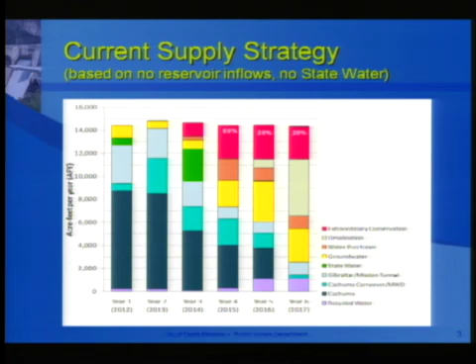This is a chart of our monthly demands. We've been watching these every month. The green dashed line is what we would plan based on the average seasonality of demands. And the blue dashed line is our target for the 20% demand reduction. So you can see in the months of June and July, we've really seen a great response from our community in meeting the targets for the 20% savings.

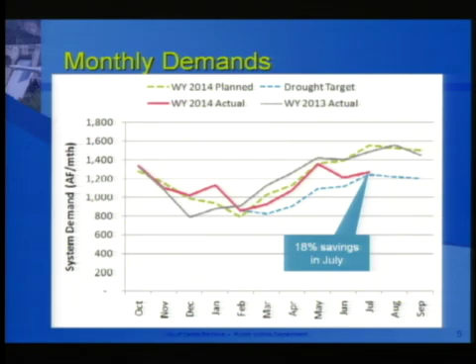This looks at it in a different way. I'm sorry, one moment. Mr. Russell? Or Mr. Ruiz?

Yeah, could you go back? Sure. I just want to make sure that I understand this presentation because I've watched it a couple of times now. And I guess I'll start by saying, why is water year 2014 planned and water year 2013 different?

Water year 2014 planned is based on an average of the last 5 years, while water year 2013 shows slight variations from month to month due to weather and rainfall. So every year there are always fluctuations from month to month. At the end of the year, for water year 13, we ended about 3% higher overall than what we would normally have planned.

Okay, so we have a common understanding, it's my understanding that 2014 actual is total potable metered water sales, including the 3 irrigation classes. Is that correct? It's actually total production overall system-wide, so it's not based on metered sales, but rather the amount of supply produced. This is looking at a combination, total demands for our potable and recycled water system.

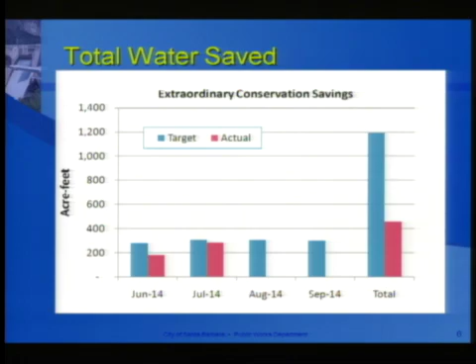This chart is a breakdown of each of our customer classes and the different tiers of water use, just to explain where the water is typically being used. We have single-family residential on the far left, by far our largest demand compared with the other customers, primarily because we have the most accounts—about 19,000 accounts for single-family residential. About half of our water is in tier 2 and tier 3, which are the green and red bars. So we're really targeting the water usage in tier 2 and tier 3, which is considered more discretionary use in our messaging.

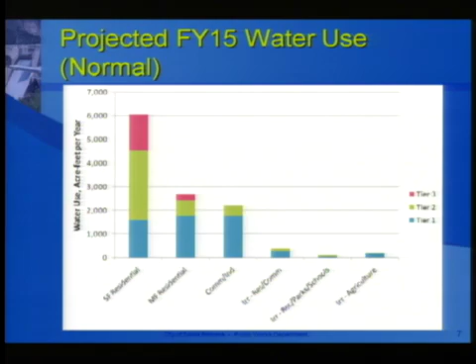Supplemental water, our goal was to get about 4,500 acre feet of supplemental water purchases, and we've been working with CCWA for several months and have secured water from Vandenberg Air Force Base, about 1,150 acre feet. That is water stored in San Luis Reservoir. We also have contracts with Biggs West Gridley, and Mohave Water Agency for another 1,800 acre feet.

And in addition, we have banked water at Dudley Ridge. That's water that the city's state water that was put into storage in the groundwater basin. And we would look to try and get that water back next year if needed.

And right now, the state water pipeline is running at full capacity to deliver all this water. It's the pipeline going from San Luis Reservoir into Cachuma Reservoir, and it will be flowing at full capacity all the way to January to deliver this water.

And so we're holding off on additional purchases at this time and going to see what next winter looks like before purchasing additional water. But there is room in the pipeline next year if we have another year with 5% state water allocation and need to fill the gap.

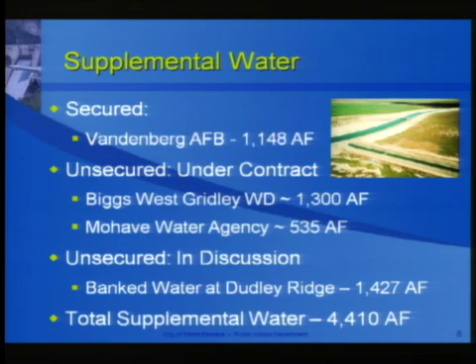So our infrastructure. One moment, Ms. Dyer. I just wanted to ask, the fish release issues and the downstream releases, they don't interfere with our ability to take state water right now?

Not right now, because CCWA has implemented a temporary fix. There was an issue a few months back, if you recall. The Hilton Creek watering system failed, and the Bureau had to use the outlet works to do fish releases, which did limit our ability to deliver state water into Cachuma.

CCWA installed a temporary pipeline. It's an above-ground pipeline that bypasses the outlet works and brings the water into a different location in the lake, which resolves the issue of imprinting, which is a concern per the biological opinion. So for right now, it's a temporary fix, but we should not have any limitations due to the biological opinion.

To receive the water, is that something they're thinking about leaving there? Because that seems like a good idea. I think we'll have to look at a long-term fix and see how much that costs. Thank you.

So the city's capacity in the pipeline from San Luis to Cachuma is about 3,000 acre feet. This is about 20% of our total annual demand. So it's not enough to meet all of our demands. It's just a portion. And without the state water system to convey the supplemental water, which we purchased this year, we would be looking at a 40% shortfall next year.

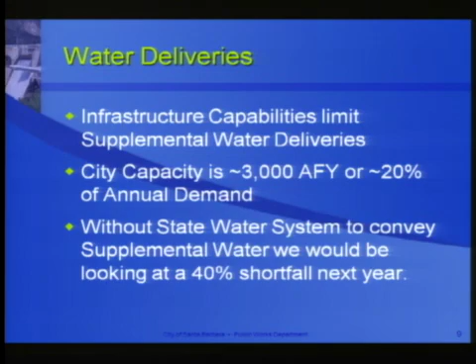Lake Cachuma is about 33% of capacity. It's important to note that not all of that is water for the Cachuma member units. Some of it is downstream water rights. And so the remaining deliverable project water, which is for the South Coast member units, as well as Santa Ynez River Water Conservation District ID1, the remaining deliverable water is expected to be 21,500 by October.

All of the member units have agreed to take a 50% or 55% reduction in our entitlement for next water year, which begins October. And the hope is to have some supply remaining into 2016.

And we've been in discussions with the Bureau of Reclamation regarding fish release requirements. Our biological opinion states that once project water reaches 30,000 acre feet, fish releases can be reduced. It doesn't go into specifics on how exactly that would happen. The Bureau will have to consult with National Marine Fisheries Service, and I'm sure there are going to be concerns with the timing and the months, and there may be some seasonality that they want to factor in. So they are currently in discussions on how that might look.

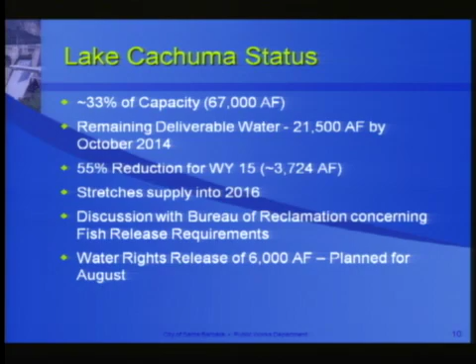Okay, thank you. Madam Chair and Chairman, the drought response capital projects, we have the recycled water system projects. I'll be telling you about our update for our groundwater projects, our desalination plant, and the COMB pumping project.

So first, the recycled water system projects. As you know, we have the tertiary treatment plant, and currently it is in construction, and it's anticipated to be online by summer of 2015 with a capacity of 1,400 acre-feet per year.

We also have a Valle Verde well project. We anticipate that we will be getting 300 acre-feet per year from this, and it's anticipated to be online at the end of this October. And this is going to be a non-potable groundwater source that we will be pumping into our recycled water system.

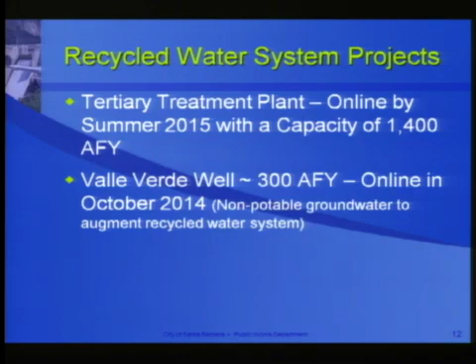Last month, I mentioned... Ms. Taylor? Yes. Excuse me, I know that we have a performance term in the recycled project construction contract. Do you happen to know what that date is? Actually, there's a presentation later on about the recycled... No, there is not, I'm sorry. I do not know that date, but the engineer, Lisa?

Yes. That's fine. Okay. Thank you. Okay.

Hopefully next month we will see us coming up out of the ground. Then our groundwater projects—our highlight is the Alameda well replacement. If we recall, the Alameda well in Alameda Park has failed, and we're trying to drill a new well. We do have a site that we've located, and we've all decided that will work for everyone. We will be going to the Parks and Rec Commission on August 27th of this year to present the project to that commission.

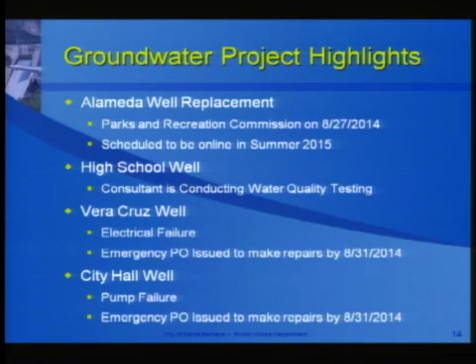Our upcoming desal project milestones—we plan to have a desalinization project update to council on September 23rd. We'll have a lot of information on that date, but I just wanted to mention what our upcoming milestones are.

The first is September 23rd, where we'll present a summary of all the preliminary design findings with recommendations and project estimates. In November 2014, we'll release it.

Actually, it'll be an RFP for design, build, operate services. In February 2015, we hope to receive proposals for these services. And in April of next year, we'll be back to council to consider an award, depending on the water supply status. By then, we will pretty well know where we stand after the winter rains, whether we need desal or not. In summer of 2016, we're projected to start the desalinization operations.

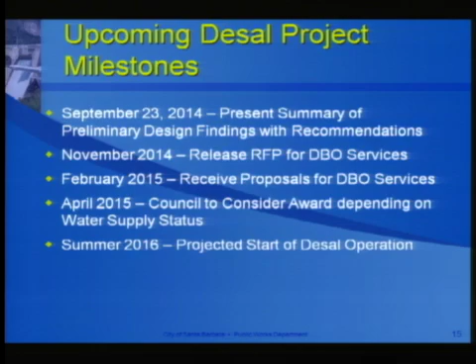The supply strategy for the desal timeline—this is a similar chart to what Ms. Dyer showed, with each year and the different water supplies from our water portfolio. In year 3, which is 2014, we've begun the pre-design. In year 4, 2015, consider award of the design-build-operate contract.

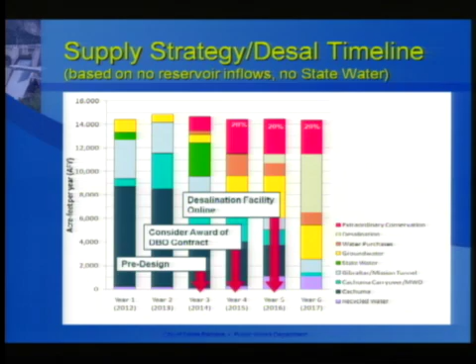Within year 5, 2016, the desalinization facility would be online. And it would be online in time for year 6, 2017, which, if we do not have inflows into our reservoirs and no state water, will be a critical need for water.

Is this contingent on some sort of permitting that we don't have in hand? This is, of course, contingent on permitting at this point. I'm not sure the status of that right now. We'll know more at the meeting on September 23rd, where we stand with that. But of course, we'd have to have permitting in hand, yes.

At the city council meeting, you mean? Yes. So would you be getting information from the Coastal Commission or the state board or something? That's anticipated—there's a lot of activity going on right now, between now and then, yes. Thanks.

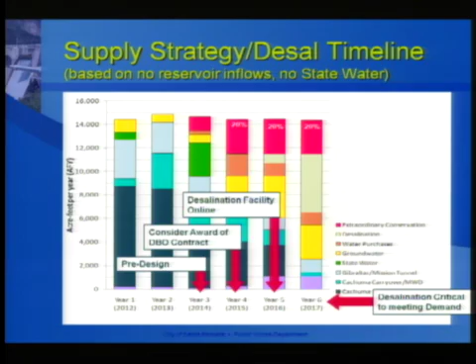September 23rd, so you've scheduled that as your city council report. Yes. Are you going to be able to give us a September update? I'm not sure. I don't want to promise that because there's a lot of things happening very quickly, and I would imagine there'll be an update. I doubt it'll be exactly the same update that will be given to council, because again a lot of information is coming in, and the consultants and staff are working really hard on this—it's a very quick timeline. Thank you.

The COMB Pumping Project is still scheduled to be online by the end of September this year. The total cost for capital and operation through March 2015 is about $6.1 million, and the city's shared cost is $2.2 million.

As for grant funding, the city received preliminary approval for a $500,000 California Department of Public Health grant, and we have to follow up with City Council with a forthcoming resolution. The IRWM grant, a regional grant application, has been submitted for approximately $2 million for this project.

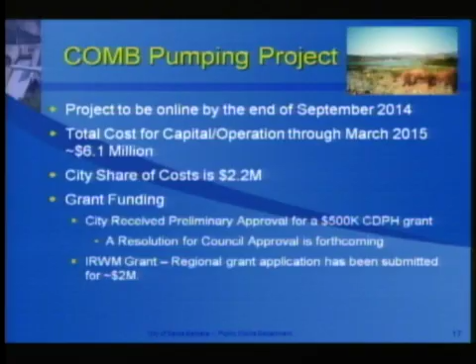Ms. Taylor asked whether that IRWM grant would go to the project overall, not specifically to the city's portion. The response was that it would be understood as going toward the city's portion of that project. We're hoping to see this resolved soon.

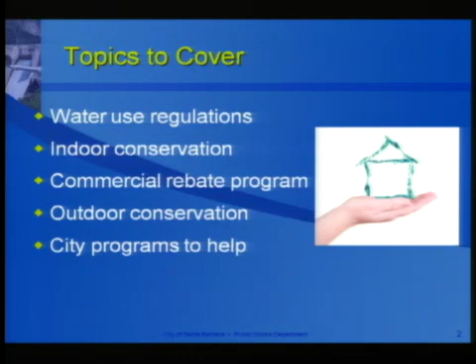The Stage 2 regulations went into effect starting May 20th of this year, and we've tried to do as much education as we can, though much of it is handled on a case-by-case basis as we see issues occur. Washing of pavement and other hard surfaces is generally prohibited. For irrigation, we're trying to limit water lost to evaporation, so for automatic sprinklers and manual watering we encourage that it take place in the evening and early morning hours when evaporation is lower. Pools must be equipped with a cover to reduce evaporation. Large commercial fountains are prohibited. Water can only be served on request in restaurants, and drought notices must be placed in restaurants, hotels, and gyms.

We have a handout on the table in the hallway, with all kinds of information and handouts that I'll be referring to, including one available in English and Spanish about these regulations.

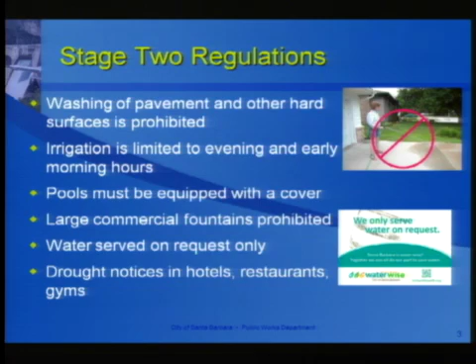This is a picture of the water use in the average home. The salmon colored section is landscaping, exterior water use, and that's a pretty large majority of the water we use—this is pretty typical for all of California. Inside, there's definitely a mixture, but we do see that light purple leaks in there.

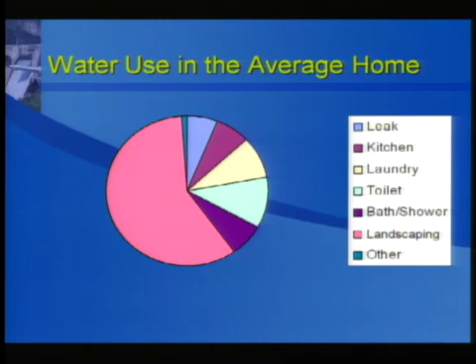Let's talk about some indoor conservation opportunities. A lot of this is behavior, because the plumbing code is much more stringent, especially starting this year in 2014. It's pretty impossible to go out and buy a toilet or a shower head that wastes water—they're very efficient, and that's all you can find in the stores.

So it's really behavior, such as when you're hand washing, instead of letting the water run, use a basin or tub. Soak pots and pans, or if you have a dishwasher, make sure you scrape the food off instead of using water to do that, as well as no running water for defrosting food.

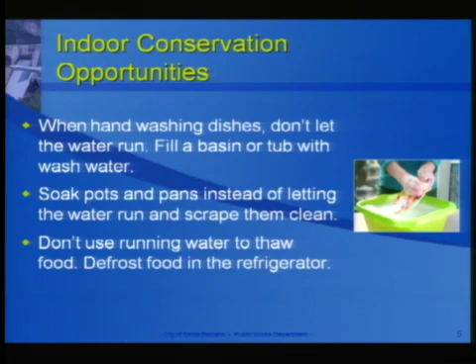Run full loads in dishwashers and washing machines—they've come a long way as well, these appliances, but as long as you're using one of the older versions, just try to wash the largest load possible. And of course, turn off the water when you brush your teeth, shave, wash your hair, etc.

This is something we tell the kids to do in class, and they generally tell us that they do it, but their parents don't. So we always try to encourage that everyone turns off the water when they do these activities.

Showering, keep them to about 5 minutes or less—try to shave off time as you can. We also ask you to join the bucket brigade and fill your bucket with cold shower water as you're waiting for it to heat up. We do have some buckets out in the hallway. Or you can also, if you have a large enough bin, stand in a bin and collect all that water. There's many ways I've heard of people taking on this challenge and collecting that water and using it for their plants.

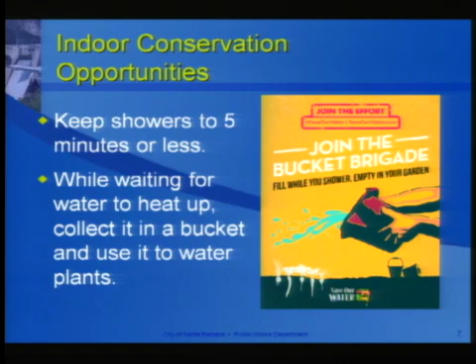Checking for leaks is always a really important one—I talk about that throughout this whole presentation. Also, we do have a rebate for high-efficiency washing machines, because it is possible to still go out and buy one that's not too efficient. So we still have a rebate on that.

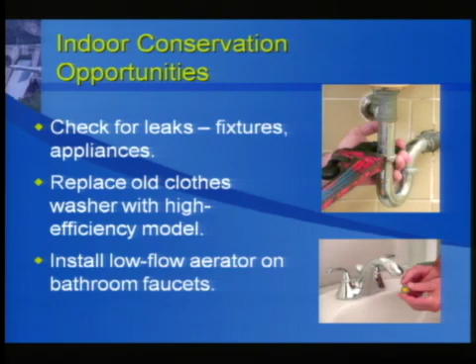And then also this really simple aerator on bathroom faucets, which you can see right here. Most of us have them on our faucets, but they have really efficient ones, and we also have those out in the hallway. They're best for bathroom faucets because you aren't filling large tubs or pots with water, so you really need it for minimal amounts of water and not really high volume. So we have 1 gallon per minute aerators out there in the hallway.

The biggest problem inside is actually the toilet. Toilets are very sneaky—they leak and they run when we aren't paying attention. So I encourage everyone to look for 3 things in their toilet.

We have dye tablets out there in the hallway, and all you do is place it in the tank, wait about 10 minutes, and then check the bowl to see if it's blue—it's just a little food coloring tablet. If it's blue, that means this flapper, which is the rubber red piece right here, is leaking. So the water's going from the tank into the bowl and then down into the sewer.

So you never hear it and you never see it, because it's not pooling up on the floor—obviously, it's going down to the sewer. That's about 200 gallons per day when that leaks. So sometimes when people call us because their water bill doubled, it's pretty regularly the toilet. And you never know when these flappers are going to start failing.

Also, when you're in the back of the tank dropping the tab in, take a look at this overflow tube and make sure the water level in the tank is about 1 inch below the top of that tube. Because here in Santa Barbara, when we're all sleeping, the water pressure rises and it'll rise in the back of the tank and start pouring over the overflow tube, and you're asleep so you can't hear it, you can't see it—and that's again about 200 gallons per day for that overflow tube.

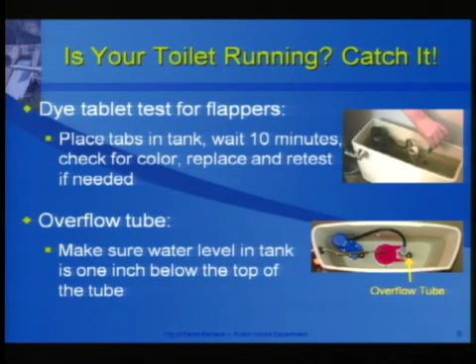The last thing, and this is another flapper issue - this is the flapper right here - if you have the wrong flapper, it could be leaking constantly with the dye tablet, or it could also be flushing at a much higher volume than the toilet's designed for. Most of our toilets are about 1.6 gallons, but as we've been going around testing some of them, they're flushing at 3 gallons or even more just because it's the wrong flapper.

So take a look at your toilet, watch the tank when you flush, and when the water goes down it really shouldn't empty the entire tank. It should leave a couple inches in the bottom, and the flapper should close pretty quickly, after about 4 seconds. If it stays up and it's running, that's how you know it's flushing at a much higher volume. So again, you just need to buy the exact flapper for your toilet. These aren't very expensive - they're tiny pieces of rubber, but they can really cost you a lot on your water bill if it's not flushing correctly.

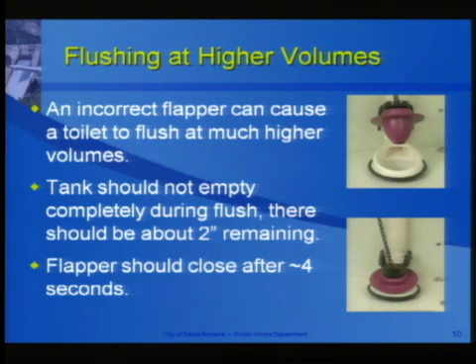Does the city provide inspection of this type of thing? Yes, we do. For our water checkups, which is an indoor and outdoor visit to your site from a specialist, we do the dye tablet test. We take a look at the level in the back of the tank, and we usually tell them to check for this, because if you flush the toilet right away with the dye tablet, the test won't work. So we educate them about the flapper issue. This one's less common - it's more common for the overflow or the dye tablet - but it's just something to, every once in a while, watch your toilet as it actually flushes to make sure it's not draining the whole tank.

And is this service provided only if someone notices their water usage seems higher than makes sense and requests it? You have to request the water checkup, but we don't have an eligibility requirement for it. So if you just wanted a water checkup, you could get one. If you think your toilet might be having issues, you can. We have this information on our website too. If people feel like they have a leak, these are the really common things we tell them to look for.

Water softeners can also be a hidden waste of water, especially some of the older kinds that backwash on a schedule. What we recommend is our hardness setting in the city is about 20 to 25 grains per gallon. You can try setting it at 20 and see how it goes. Sometimes it takes about 2 weeks for these softeners to change over and backwash. If you think it's not soft enough, you can try setting it higher and higher. But we've had a lot of people simply set their water softener lower.

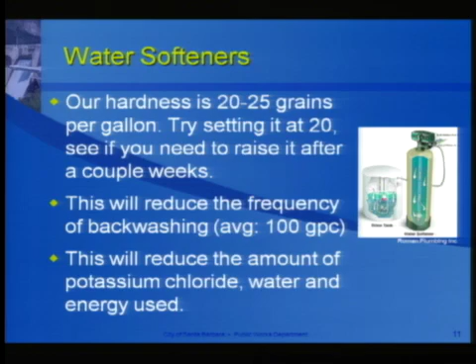For businesses, we have a great program. We've had it for about a year now for our high water use commercial, institutional, and industrial customers, where we go through and do a full site visit of all the fixtures and every way they use water. We'll measure the flow rates of the toilets. This is when we really realized what an issue those flappers were if they weren't the right kind - we would go to a site where the entire array of toilets were all flushing at too high of a volume.

So this is when it really was brought to our attention. We'll help identify leaks and efficiency upgrades, and then we present what they can do and the projects we recommend based on the return on investment. Right now we're going through the City College campuses - they're going through and changing out a lot of the fixtures - and also the schools, Santa Barbara Unified School District.

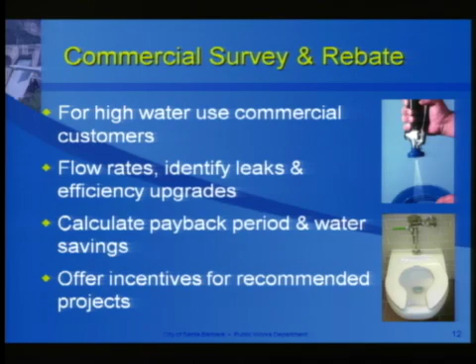All right, so now we're going to focus on outdoor conservation. About half of the water used in the city is for landscape watering, and of course we have beautiful landscapes here, but we want to make sure that they're using the right amount of water.

Just for a comparison, the average 5-minute shower uses about 10 gallons total, and the average 15-minute lawn watering uses about 700 gallons.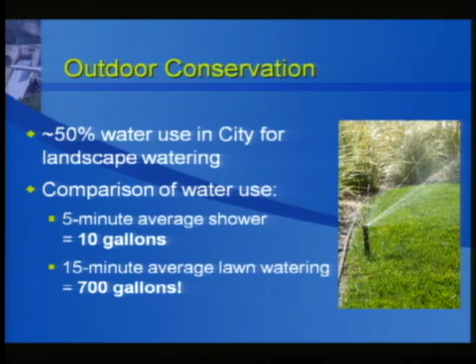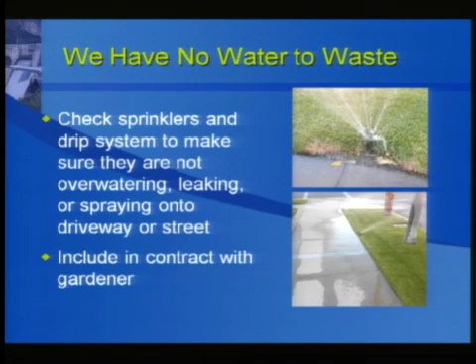So this is the absolute most important thing that we can encourage people to do, is pay attention to their sprinkler and drip systems, because they come on at night, hopefully, if you're following the regulations. So it's that 4 a.m., do you know what your sprinklers are doing syndrome, where people aren't paying attention to if they're watering correctly, if they're running down the street, if they're broken, etc. So we really encourage people to check their sprinklers, take a look at what they're doing, or if you have a gardener that does this, make sure it's included in their contract to check this every time they're there, whether monthly or weekly, to check this irrigation system.

And we can help you do that. The city has a free water checkup, which is what we just talked about. It can be indoor and outdoor, or you can just have an outdoor evaluation, especially if you have a large site—it might just make sense to focus on the outside. But we'll take a look at the irrigation controller and the nozzles and the drip system and see how it's scheduled and if there's any red flags that we can see. So this can be scheduled at any time by calling the hotline number, which will be at the end of the slide, but it's 564-5460, and we'll come out to the site.

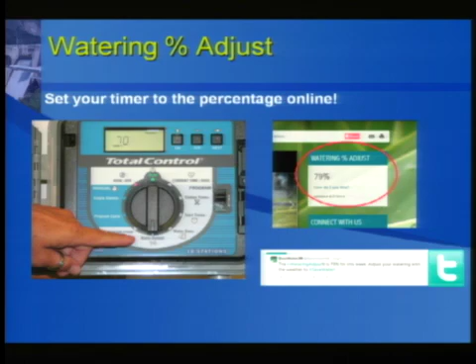This is something you just plug into your sprinkler timer. Almost every single sprinkler timer, even the old ones, has a section called water budget or water adjust, or just a percentage symbol. What you do is take our number, which right here is 79 for last week, and plug it into your sprinkler timer, and that will reduce the run times for every station you have on your program. So it's really just a one-button adjust, so you don't have to go through and change down all the minutes of every zone. We also have it on Twitter every week, so you can just get it tweeted to you if you don't want to look it up on the website. And this will reduce the amount of overwatering.

If your plants are only getting as much as they need, you can cut out about 20 to 30% of the water that you apply to the landscape, and your plants will be healthier.

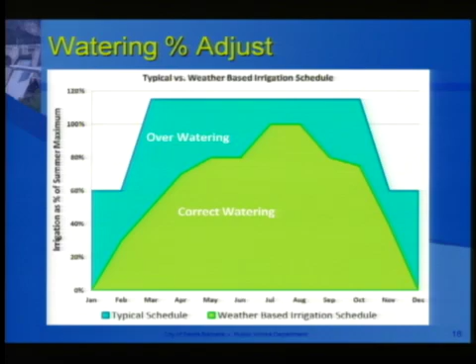We also have a rebate program. This rebate program has been going on for 5 years now. It's 50% of the cost of materials, which can include all kinds of irrigation equipment, water-wise plants and mulch, smart irrigation controllers, gray water material, permeable surfaces, and now pool covers. It's up to $1,000 for single-family homes and up to $2,000 per meter for commercial, multifamily, and HOAs.

And the most important thing with this rebate program is that we come out and do a pre-inspection before any work is done. Some people have lawns right now and they're letting them go, which is fine—we encourage that. Just take pictures now, get a pre-inspection, and we aren't enforcing the 4-month time limit. We're giving everyone an extension to replant when they're ready, and they can just contact us.

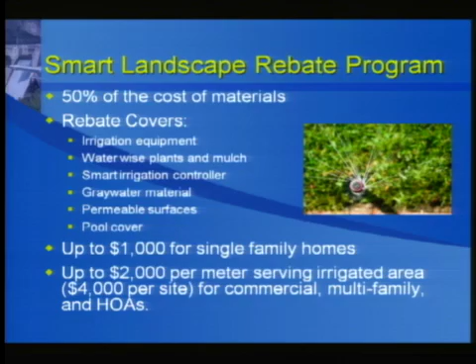Can you just expand upon that a little bit more, why you're not sticking to that 4-month timeline? Sure, of course. Especially since we're in the middle of summer, we don't want to encourage everyone to replace their dead lawns and then put in new plants and start watering them.

In the fall, plant water requirements are much lower. They put down roots instead of shoots, so they don't require as much, and hopefully we'll get a little rain to help establish those plants. So we're encouraging folks to wait until the fall to replant, or until the drought lifts, so they don't need to use as much potable water. Even water-wise plants still need water to get established.

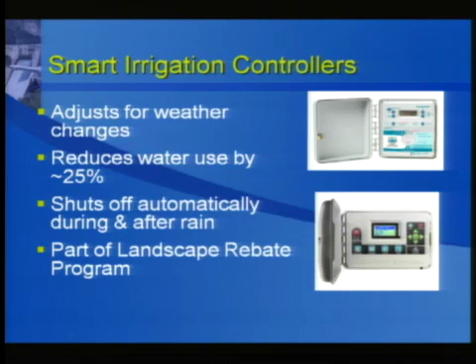Smart irrigation controllers are part of the rebate program. They basically take that whole watering percent adjustment and do it for you. Just like cell phone technology, sprinkler timers have come a long way—it's a computer on your wall that knows what kinds of plants you have and the weather at your specific home. It gets all its data, plugs it in, and reduces the amount of water the plants need. We recommend these and offer workshops on them too, since they're a little complicated at first but then very easy.

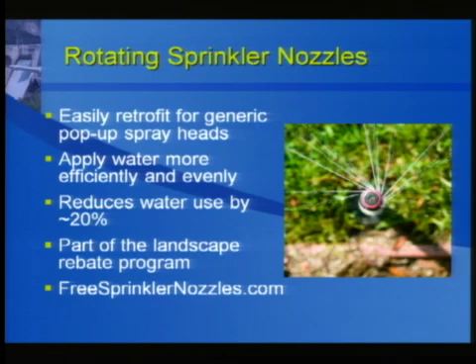Rotating sprinkler nozzles are also part of the rebate program, but we're also giving them out for free now at freesprinklernozzles.com—there's a postcard for this in the hallway. As you can see in the picture, they send out little fingers of water, so there's much less evaporation. Instead of just blowing into the air and being swept off by the wind, it distributes really exact droplets, reducing water use by about 20% just by being efficient in the nozzle itself. They're also very easy to install—you just unscrew the old one and put the new one in.

Gray water is a growing topic here in Santa Barbara, and it has been for many years. One of the easiest systems to install is called the laundry to landscape system, and it doesn't require a permit, which makes it even better. It just uses the pump from the washing machine to push the water outside, and the water must be released under mulch in what we call a mulch basin. The best things to water with gray water are probably fruit trees or some woody species, like a row of fruit trees or a hedge, because this isn't something you can put in sprinklers and spray into the air—it needs to be released under mulch.

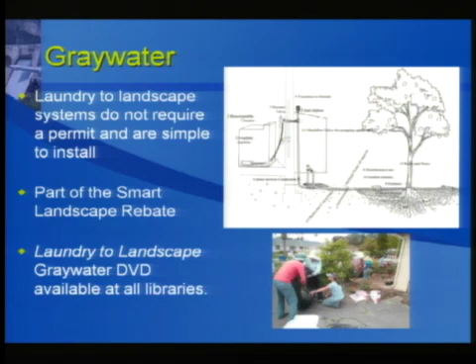This is part of the Smart Landscape Rebate Program for the materials cost, and we also have a lot of workshops around town. We work with a nonprofit called the Sweetwater Collaborative on hands-on workshops where they show people how to put these in themselves. We also have a DVD on how to install them yourself, available at all the libraries.

Rain gardens are also a great idea. Sometimes we don't get enough rain to contain in barrels, but you can always contain it in your soil and turn it into a sponge. There are two demonstration gardens right in downtown—at the Santa Barbara Association of Realtors and Spencer Adams Park. They redirected the gutters into the front yard and created a dry creek bed with mulch basins underneath. So what you see on the surface is nice with plants and rocks, but there are deep pits dug down so the water can percolate into the groundwater instead of running off into the storm drains.

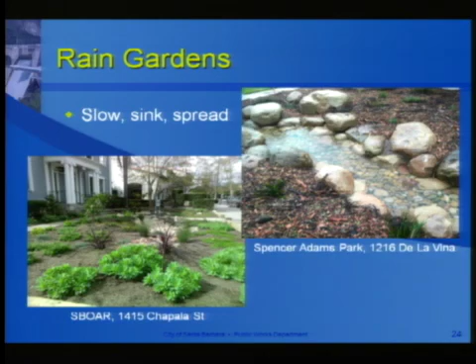We also have a great TV show about sustainable landscaping called the GardenWise TV show. We have about 30-something episodes at this point, all online at waterwisesb.org or the city site, and they replay on county TV and city TV pretty often. Right here you'll see our host, Meg West, showing how to do a worm bin, and this is also a compost tea demonstration.

We have a virtual garden tours website that is linked from our own website. So if people don't know where to start—they have a lawn, for example, and don't know what else to put in their front yard—this has great WaterWise plants. It's a database. You can click on all the plants and get all kinds of information on what you want to put in your yard.

We also have a Green Gardener program. This has been going on for about 14 years, and it trains gardeners, maintenance gardeners, on sustainable landscaping practices. It's held every spring and fall through Santa Barbara City College Continuing Education, and they're also holding it in Santa Maria. It's a 15-week class, taught bilingually, and the materials fee is only $20 for the whole class.

Leak detection—one of the best things to find a leak outside, and this also includes inside, is just to read your meter when it's not being used. If you see this black triangle spinning, that means there is water flowing through the meter. This is really the most basic way to find out if you have a leak anywhere on your property. Also, if you have one of these meters, you'll see this little disc rotating, and that means you have a leak. We have a flyer out in the hallway for this.

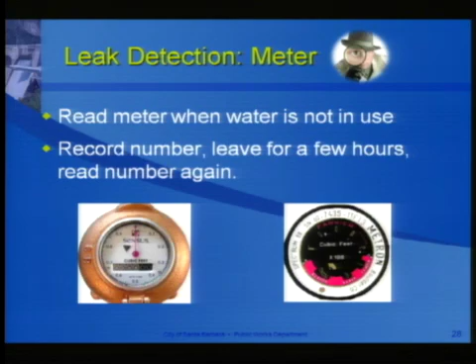Also, if you have a period of time where you're not going to be at home—perhaps you run errands or go to work—write down the number, leave for a few hours, come back, and hopefully no water had been used. Read the number again. It's just like an odometer, and it ticks up.

Also, we are looking for our community to help report any water waste or violations that they see. They can call the conservation hotline. The best thing is to send photos, so there's two different ways to do that. You can email them to wconservation@santabarbaraca.gov, or we have an online reporting forum that's getting more and more popular because these come straight to my inbox, and that is santabarbaraca.gov/reportwater. And here is our website and our phone number for more information.

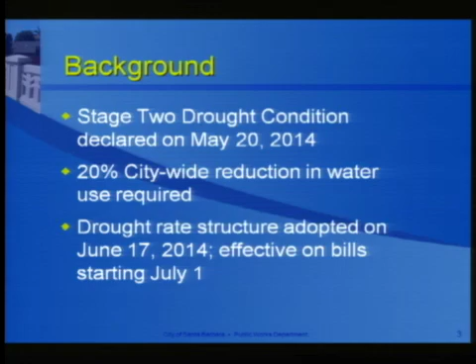We already talked about this slide earlier, so I won't go into the details, but the point is that we're currently in year 3, and we're looking ahead to years 5 and 6, where if we have continued extreme dry conditions with no reservoir inflows and no state water, we will want to be prepared for the decision to reactivate the desal plant. The purpose of our discussion today is to discuss the rate study and incorporating the cost of doing desal into our water rates.

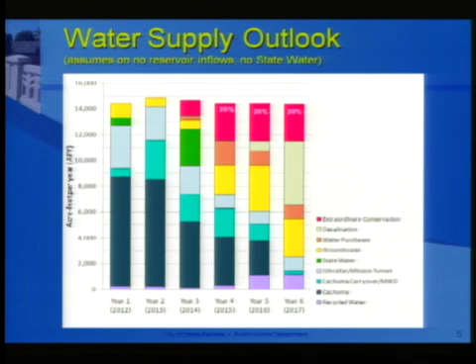We have been authorized for a contract with Raftelis Financial Consultants. They are the consultants that helped build our previous analyses. We have an existing rate model that they developed and did a comprehensive rate study a few years ago, and have supported us with our drought water rates. And so we will be building on that previous work and incorporating the cost of reactivating the desal facility.

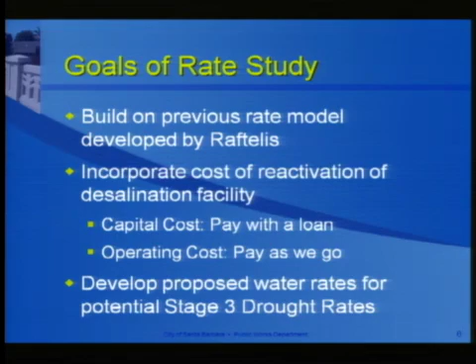The approach will be to pay the capital costs with the loan and pay the operating costs as we go, as we produce the water. And the goal will be to develop water rates for potential Stage 3 drought condition.

So there's two scenarios for desal based on our water supply condition and the level of rainfall we may receive. The first phase would be 3,125 acre feet per year. This is the case where we get another dry winter this year, and in April of 2015 we'll be asking council to consider award of a contract for a desal plant sized for 3,125 acre feet per year.

That would be online by summer of 2016. The phase 2 expansion to 7,500 acre feet per year would be if, again, we get another subsequent dry winter. Then the following April of 2016 is when we would be looking for council to consider authorizing the work to increase the plant capacity for supply to be online in spring of 2017.

At this time, our rate study is only looking at the cost of phase 1, for the 3,125 acre feet per year plant. So this time next year, if we get another dry winter and reassess our costs and supply outlook, is when we would potentially do another rate study if it's necessary to go to phase 2. So at this time, we're starting with phase 1.

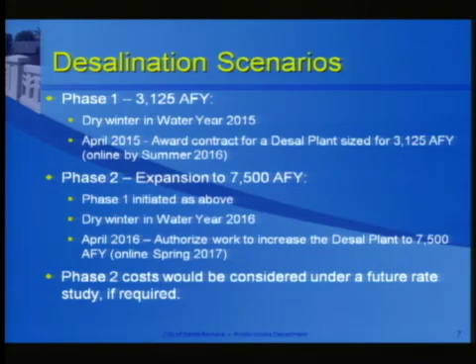I'm just curious because I don't remember if this is part of a plan, but the 7,500, is that something new? Is that part of an existing plan? Where did that come from?

The current preliminary design study, which will be presented in more detail next month, looked at several sizing scenarios. So these are two, the 3,125 and then 7,500. And I believe 10,000 acre feet per year was also looked at. So the plant hydraulic capacity is 10,000 acre feet. And in the 89-90 drought, the treatment capacity was constructed up to 7,500 acre feet.

So the existing pumps that are there, is that what you're talking about, hydraulic capacity? The piping, the intake, and major piping. The 7,500 is kind of preliminary from the consultant? Well, it's just one of the scenarios that was looked at to examine the facility engineering requirements and the costs.

At this time, we're assuming it's really the City of Santa Barbara's facility, and so if there was a larger size plant and it became an option to provide water as a regional supply, that's likely what the larger size plants would be. Thank you.

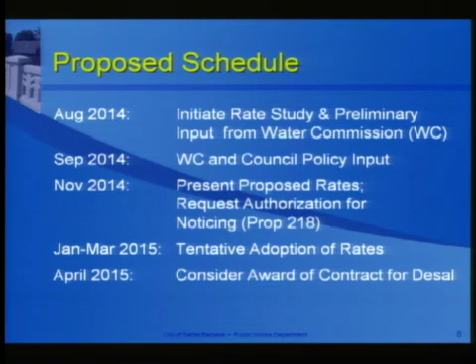These are some of the policy questions that we have, and I'll just walk through all of them, and you're welcome to provide feedback today. We're really going to be focusing on the first two in the presentation today, but if you have input on the others, feel free to comment on them.

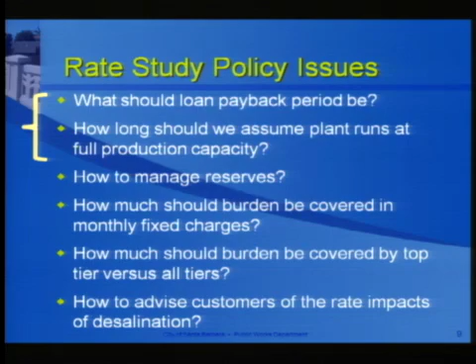So what should the loan payback period be? How long should we assume the plant runs at full production capacity? How to manage reserves? How much burden should be covered in monthly fixed charges? Monthly fixed charges affect everybody, while the volumetric charges are based on how much water you use. How much burden should be covered by the top tier in the volumetric rates versus all tiers? And how to best advise customers of the rate impacts of desalination.

So these are preliminary numbers based on information from the preliminary design report that's underway, and these costs are being refined, but I'm using them for purposes of the questions we're asking today. For a plant capacity of 3,125 acre feet per year, the preliminary capital costs are $32.4 million.

When the plant is in full production, it's $5.2 million per year operating cost. When it ramps down to a lower production standby mode, it's $2.5 million in operating costs. These are preliminary, they're being refined, but

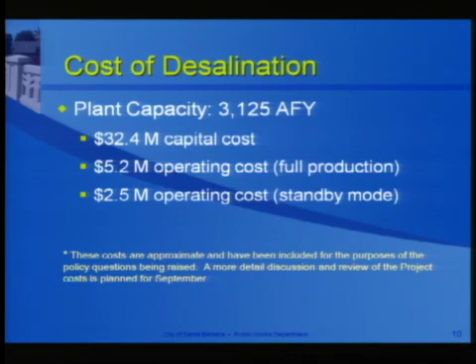They're accurate enough for purposes of what we're doing today. Can you tell us a little bit about the standby? What does that mean?

My understanding is that the plant production can be scaled back substantially, for example, in normal to wet years when we don't need the supply. And so in this scenario, it's scaled back to a production of 500 acre feet per year.

To follow up on that, would that have an impact on the type of permitting that we would need? No, because we're continuing to operate, it's just the volume, so it's the same permit? Right. Okay.

So capital debt service looks at a 10-year payback period versus a 20-year payback period. This is really the heart of what I'm trying to get your input on, which one we should use for assumptions in plugging in numbers into the rate model. For a 10-year payback period, the current market conditions would be 2.12% interest rate.

The annual payments would be $3.8 million. The total payment over the 10-year period would be $36.2 million, and of that, interest would be $3.8 million.

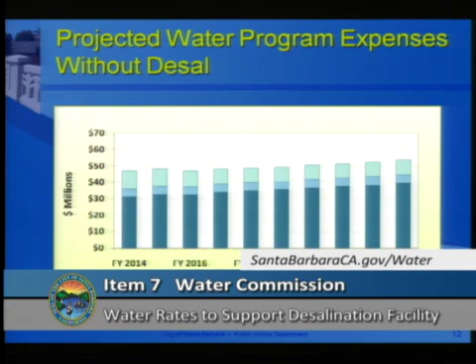This really feeds into what we're assuming for our annual costs over that 10-year period. I've put together a couple of charts to show what our projected expenses are over the 10-year period without the cost of desal. You can see there's a slight increase from about 1 to 3% per year over this period, primarily due to the operating costs.

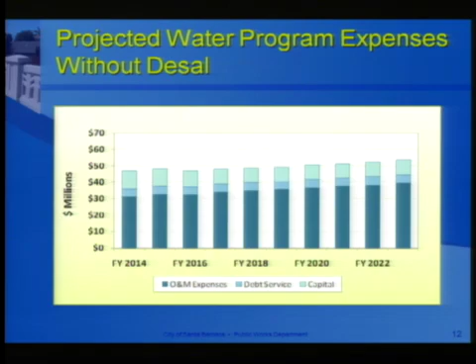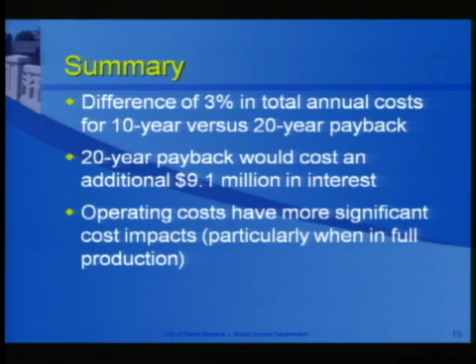One thing I should mention that wasn't in this presentation is that we did look at a 5-year payback period. That ended up being $2 million in interest, but our annual costs increased by 20 to 25%. Here's a chart showing what that looks like.

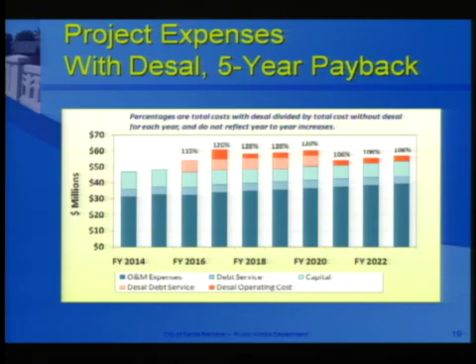We would assume that the top orange bar, if the drought extended and we keep needing to use the facility for large production, would be something like that top orange bar added to those other years also. This is for a 3,125-acre-foot-per-year plant, so if there was a need to expand, or even to continue to operate it right at full volume, that would entail changing the rates again.

We'll have to reassess our rates. Whether the drought continues or not, we're just going to have to reassess where we are next year and take one year at a time.

Other questions? Nobody else has any.

I'd be interested in what Mr. Samario thinks about the financing ideas. They're kind of asking us for input without professional financial analysis, so it's difficult for me to give input on that question. I know it's standard procedure, but I don't know if that's applicable here, to take the longer-term approach so you equalize rates over a longer period of time. That's been my experience in water utility financing, but I don't know if there's another approach we should consider.

On July 29th, the City Council received a similar report, and part of that was a little different—just how Water Resources is falling behind this water year in revenue versus cost for a variety of reasons. One of the concerns I've heard from City Council members is that we shouldn't focus entirely on desal, as we're incurring new and probably ongoing and permanent capital costs as we go through this experience, and we need to make sure we're funding those new and anticipated capital costs as we go and not fall too far behind.

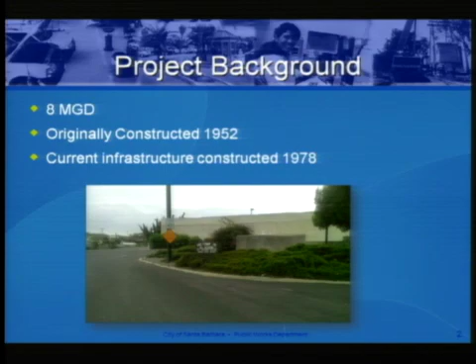We started this project back in 2010 when Brown & Caldwell was hired to do an assessment report on our air process, which is basically all of the air in our secondary and aeration basins. In 2011, Brown & Caldwell was hired again to do a preliminary design report, and as we worked through that, we realized we needed to treat the whole secondary process as part of this evaluation. So Brown & Caldwell was hired again in 2013 to do a second phase, incorporating all of our secondary treatment processes: the aeration basins, secondary clarifiers, the RAS, and basically the whole process.

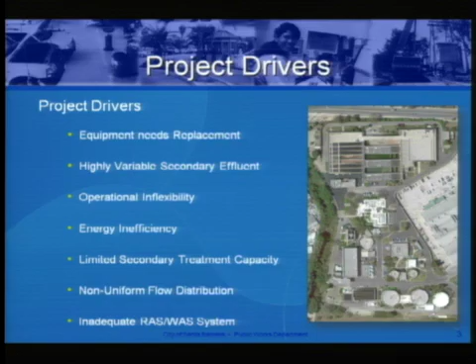The project will address some... I'm sorry, for probably about 4 years now I've been trying to follow. I was particularly interested in the recycled water facility.

Staff's been working on this part of it, and I'd like to understand better how they work together. We've got our recycled water facility under construction. I know over the years there was some debate as to which you should do first and how they're interacting, so to the extent you can help me there, I assume this is going to make our recycled water even better.

But if you could, just explain how they interact and why we're doing it on this timing. Because I tried to push recycled water, and for a while I was being told maybe we should do this first, and I don't really remember exactly how it came out that we're doing it on this timeline. But to the extent you want to add that to your presentation, I'd appreciate it.

Sure, I'll go ahead and address it right now. Bullet 2, highly variable secondary effluent - that's been a long-standing issue at El Estero. Traditionally we've been high in turbidity, high in total suspended solids, and that's affected our ability to filter out our secondary effluent for tertiary treatment.

Now, the tertiary project, we went to an MF system, so it can handle our effluent the way it is now. Once that system's up and running, we're going to be producing acceptable quality. It will meet Title 22 requirements.

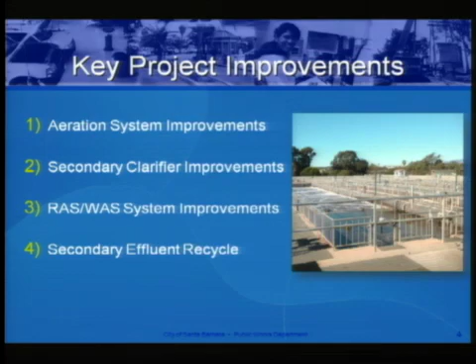So most of the improvements can be categorized into these key improvements: the aeration system improvements, secondary clarifier improvements, RAS-WAS system improvements, and secondary effluent recycle.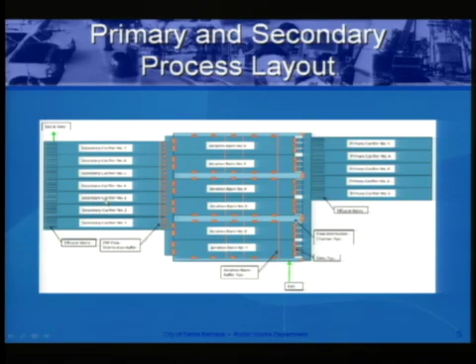Just to give you a lay of the land, here is our primary and secondary processes. We've got our 5 primary clarifiers right here on the right. We have our 6 aeration basins - currently aeration basin number 6 is an equalization basin, but it will go back online with this project as an aeration basin. And then we have our 7 secondary clarifiers on the left.

The aeration system improvements involve replacing the blowers - this is one of the key items in this portion of the project. Our blowers are about 40 years old and they're oversized. They were designed for coarse bubble aeration, and we do fine bubbles, so we really have a lot more air than we need. We have problems with turn down, so it's kind of like full blast or not enough - we just can't get it dialed in so we can efficiently aerate our wastewater.

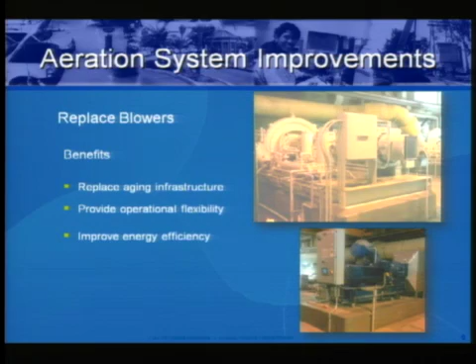With new blowers, we're going to be able to provide that operational flexibility. We'll be able to match our air demands with our air supply much more closely, and we'll be much more energy efficient. Our 40-year-old blowers - every time they break, we panic about how we're going to get new spare parts - we're going to be able to fix them and feel good about having them in our system.

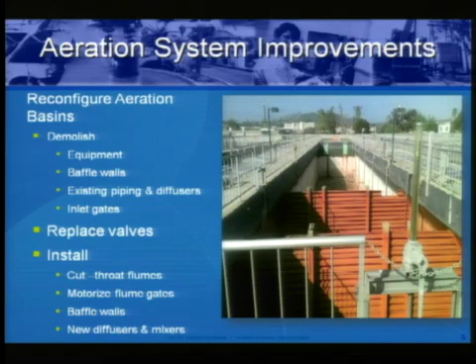We're going to be installing cutthroat flumes at both the front and the midpoint, and that's going to allow us to have much more equalized flow coming into our aeration basins. We're going to be motorized so that our operators don't have to come up and lift the slide gates. It'll all be automated. We'll have new baffle walls, new mixers, new diffusers.

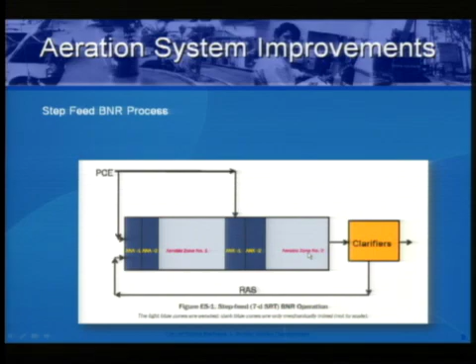And this is what the process will look like. Your primary clarifier effluent, or what we call PCE, will be coming in at 2 points, one at the front, one at the mid, and it'll be going through the process. We've got 2 anoxic zones, and then it'll go into an aerobic zone where we'll be adding air. Then we'll go back to 2 anoxic zones, we'll be mixing, and then we'll be going back to aerated zones again before it goes into the clarifiers.

Now, to treat flows past 19 MGD, when we're getting up into our wet weather flows, we have to operate under a different scheme because this process won't work. So what we'll do is send all of our primary clarifier effluent to the midway point, and that's going to reduce the solids load on the clarifiers. It'll just go in a loop, and that's how we'll manage our peak wet weather flows. We anticipate that we can match the IPS, our influent pump station, pumping capacity at about 32 MGD when we operate under reaeration mode.

The secondary clarifier improvements - here's a secondary clarifier - those really are targeted at flow splitting. And again, if you look at the scheme, you'll see how everything is offset, and what that's causing is some short circuiting, especially down in our secondary clarifiers. Our wastewater will decide that it likes one or two of the clarifiers on the ends more than the others, so we're having unequal sludge withdrawal.

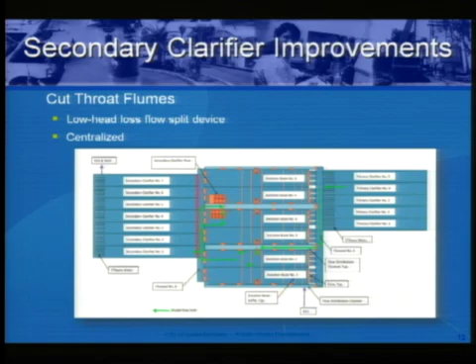We're going to be installing what's called a cut-throat flume right here, and that's going to bring all of our effluent from the aeration basins to one centralized location. Here's a blow-up of it, and then it will get evenly distributed to the clarifiers.

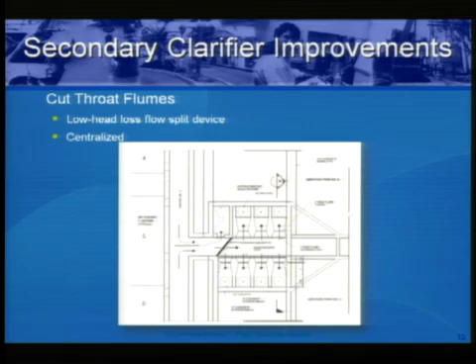We'll also be wasting mixed liquor instead of wasting RAS, activated sludge. It's a slight change in what we do now, but we will be able to better control our foam as it comes off of our aeration basins, and we will have a better operational procedure or process by doing that.

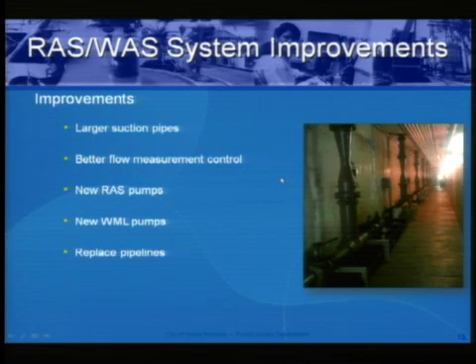The RAS-WAS system improvements - we're going to be doing larger suction pipes, better flow measurement and control. You can see the old Venturis in these pipes; those will be gone and it will be more automated. Here are our pumps for our RAS-WAS system. We will be upgrading all of those to new pumps that will better meet our demands and our variation in flows.

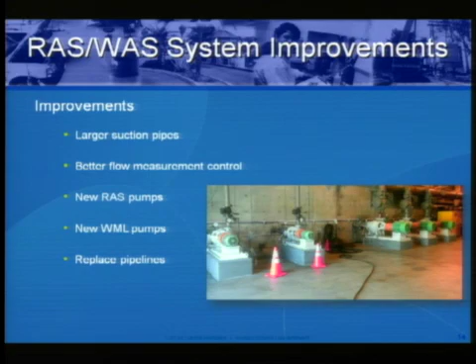We'll also be replacing our pipes. We have 40-year-old pipes coming out of the system that bring the waste mixed liquor down to the DAFT. We'll need to be putting new ones in and upgrading those as well.

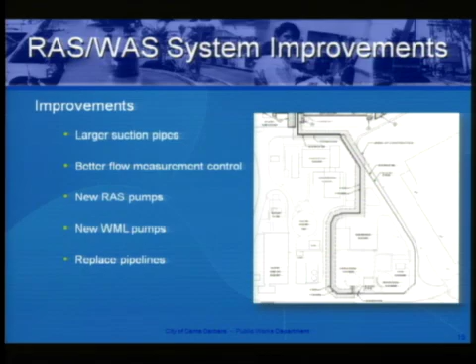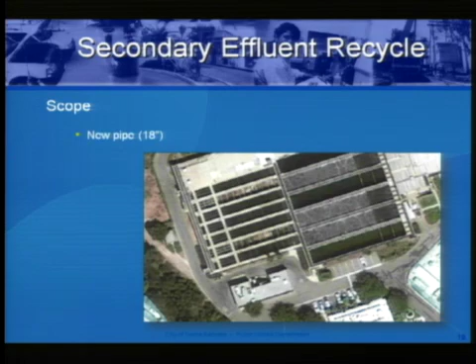The last thing is secondary effluent recycle. This is new. We will be taking secondary effluent and a small portion of it directly down to the IPS, which is right here, and recycling it. The purpose of that is to really get a constant flow through the plant. We feel like if we can have constant flow and limit the variation, it will be very helpful operationally. Plus, you'll be bringing some of the nitrates from the nitrified effluent down to the IPS, which will help start the treatment process, and we're expecting reduced chemical costs from that.

I talked a little bit about this, and I'll go into greater detail on how we're going to be changing the way we process our wastewater. Currently, we have wastewater coming into the influent pump station. It goes into the grit chamber where we slow it down a little bit. Our inorganics settle out and go to disposal. The water continues on to the primary clarifiers where, again, we slow it down. We start getting some of the organics out of the wastewater that go to the gravity thickener, and then we'll be sending the water to the aeration basin.

When we get to these first two anoxic zones, it's going to be mixing, and what we'll be doing there is denitrifying our RAS, because in addition to the primary clarifier effluent that's coming in, we'll also have that return RAS stream coming in. That's going to have some nitrates in it.

So this first section is going to be for denitrification of that. Then we'll go over to the first aerated zone, and that will promote nitrification. Then we'll go into this second anoxic zone, and that will denitrify the previously nitrified effluent in the aeration zone. And then finally, we'll do one more aeration zone, which will oxidize your BOD.

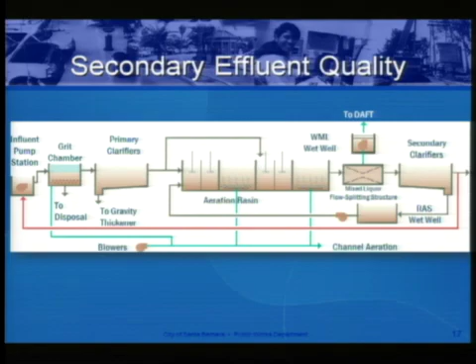Coming out of the secondary clarifiers, we've got the RAS loop, and we also have the recycle to the IPS, and also the primary, or the final effluent that goes down for ocean discharge and tertiary.

So here's where we've been. We've done the assessment, we've done the PDR, we've done a second phase of the PDR, and we are ready to start preliminary design, detailed design. This preliminary design will bring our project up to about the 60% design phase.

We'll then be rolling forward to final design, bidding the project, and anticipate that we will have construction complete in 2017, maybe 2018. It's about a 2-year construction period.

We are in the process of obtaining an SRF loan for this project. We've applied for $20 million. We have received notification from the state that they are working to get the finance agreement to us. We expect that within the next 2 or so months that we will have an executed finance agreement, and we'll be able to fully fund the final design.

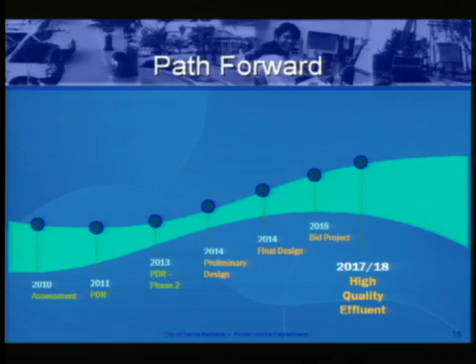However, we want to move forward with preliminary design now. We've got the money, city funds, to pay for this 60% design stage, and we will be going back for a second contract for final design once that SRF loan comes through.

So with that, I'd like to answer any questions that you might have.

I had to sort of follow up to my previous comment. Is this everything? I mean, like I said, I've been here for 7 years. About 4 or 5 years we've been working on between recycled and this. I know that there were some budget issues as to whether water resources or wastewater pays for what. So I'm just, what's the big picture? Is the recycled facility and this, is that it? Or is there other pieces to it?

Define everything. Are you talking about everything that's going on at El Estero, or are we talking just the secondary treatment? I guess, I'm not an engineer. So I looked at this as our wastewater facility, which I understand today why recycled is different, but I always kind of saw it as one big thing. And we've been talking about this. Like I said, I've been here for 7 years. We've probably been talking about it for 5 at least. And so I understand the recycled facility. I sort of understand what you've just presented here. Is there more to it that we're going to be doing within a foreseeable period of time?